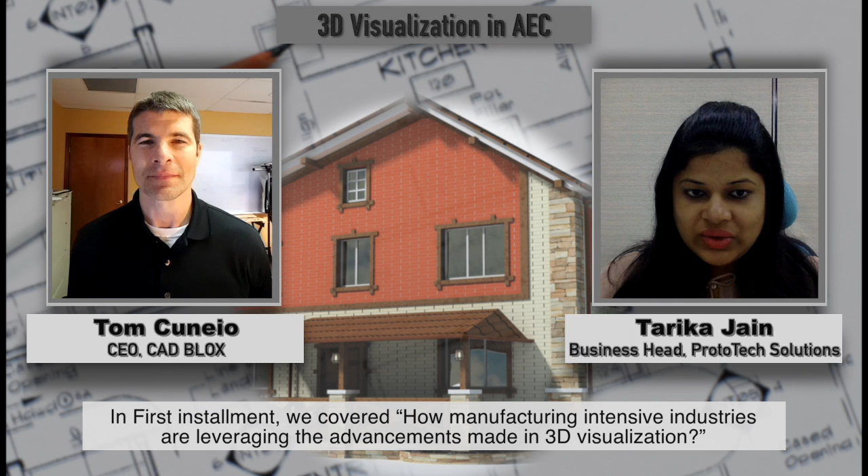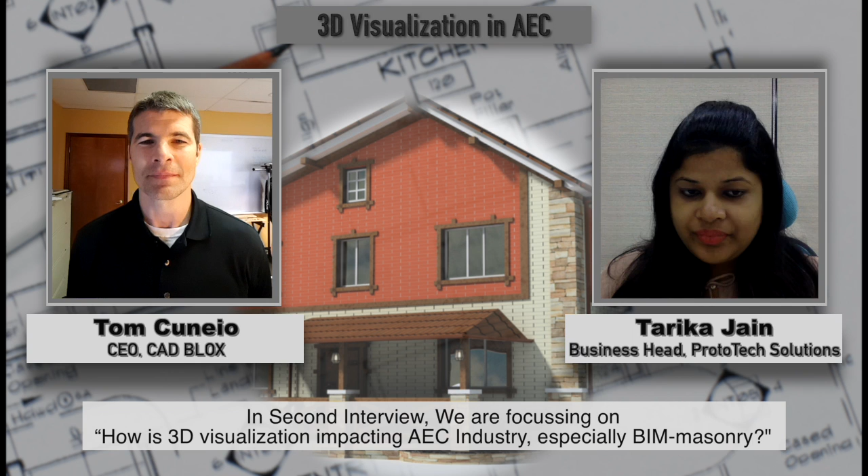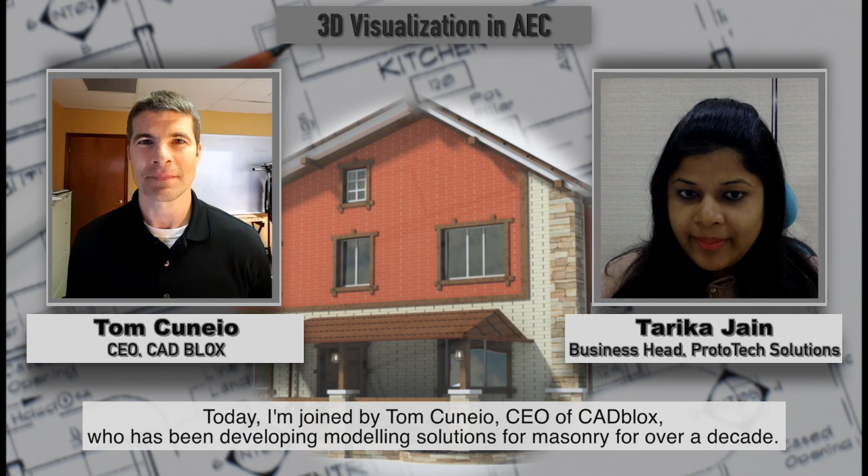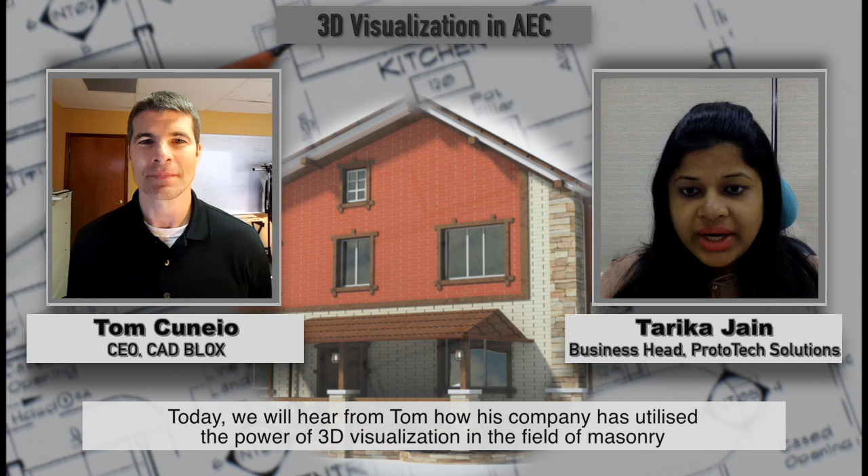In our first installment, we covered how manufacturing intensive industries are leveraging advancements in 3D visualization. In this second interview, we focus on how 3D visualization is impacting the AEC industry, especially BIM in masonry. Today I am joined by Tom Cuneio, CEO of CADblox, who has been developing modeling solutions for masonry for over a decade. We know that a BIM solution can reduce the cost of masonry projects and improve the design process. Today we'll hear from Tom how his company has utilized the power of 3D visualization in masonry, and how it's impacting masonry production and delivery.

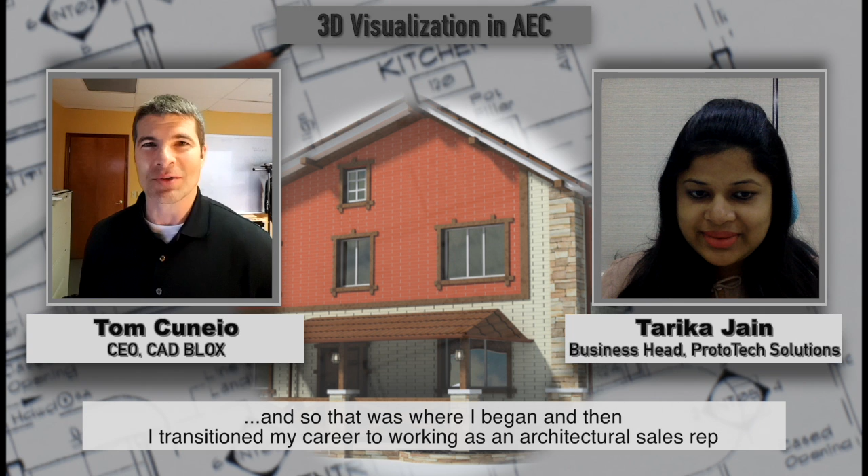I began as a mechanical engineer, and mechanical engineering design is largely based on 3D modeling to complete components. That's where I began. Then I transitioned in my career to working as an architectural sales rep for a concrete block manufacturer.

While I was there, I began to see how masonry jobs are ordered, installed, and produced. It's a really interesting challenge because you may have 100,000 or hundreds of thousands of pieces and parts in a large commercial job, with 100 or more unique shapes within that design. So you have this challenge of identifying and locating all these unique pieces and parts within a very large array, and it's actually an ideal application for 3D modeling.

So that's where I got the idea: could we apply the 3D modeling tools of engineering design to a very large commercial puzzle?

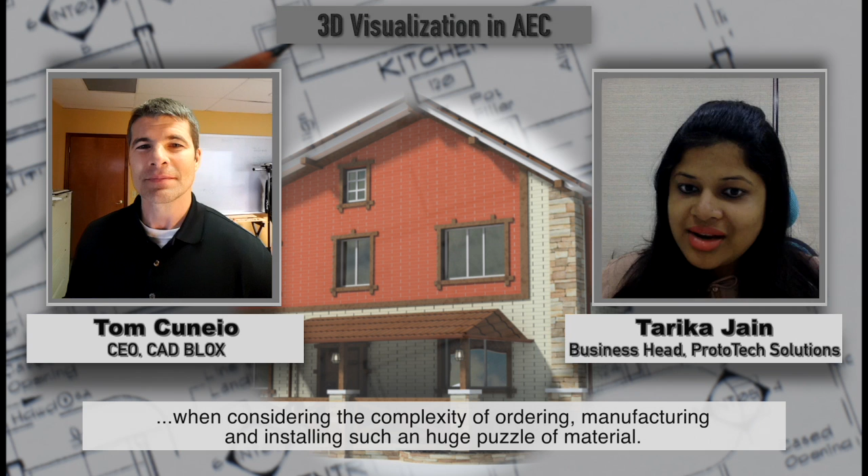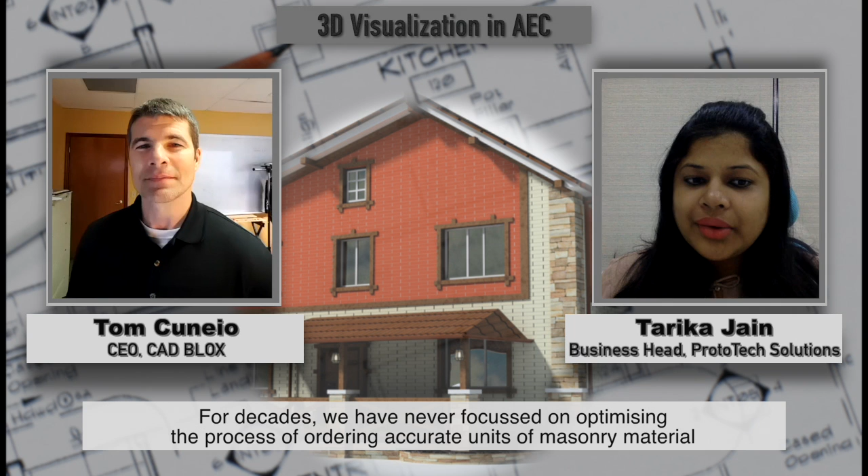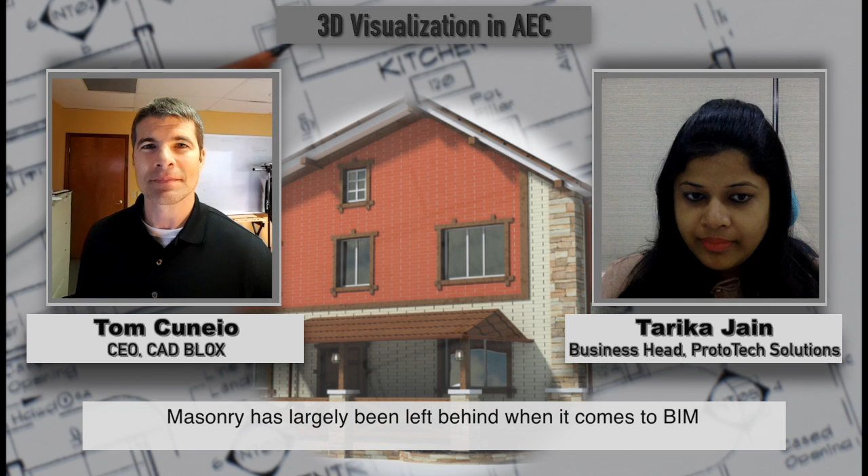We understand that masonry is in a class of its own when considering the complexity of ordering, manufacturing, and installing such a huge puzzle of material. For decades, we have never focused on optimizing the process of ordering accurate units of masonry material, and it's been an accepted norm in the industry. Masonry has been largely left behind when it comes to BIM. So how have modeling solutions like you are developing changed the way masonry is designed and installed?

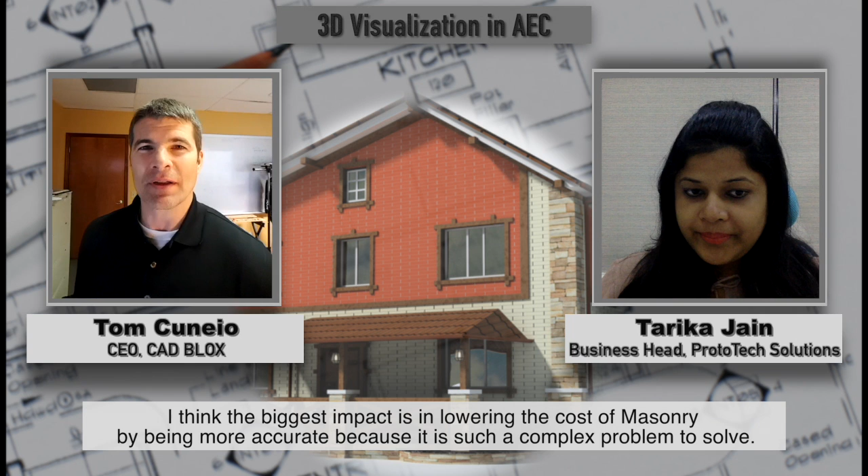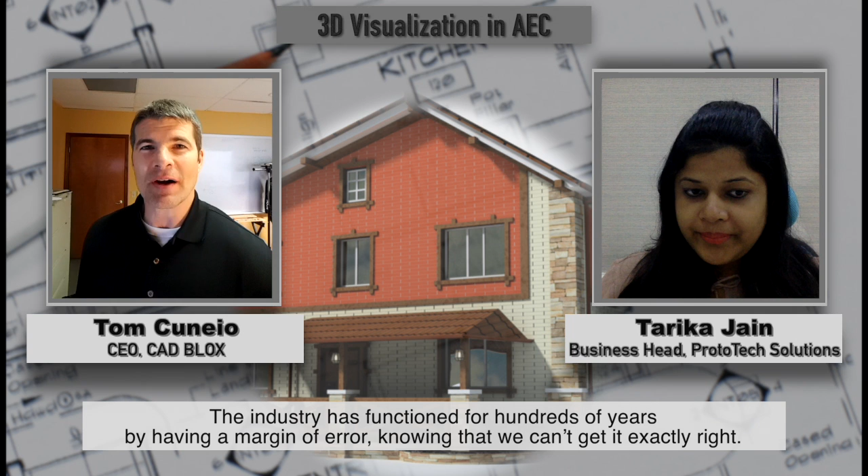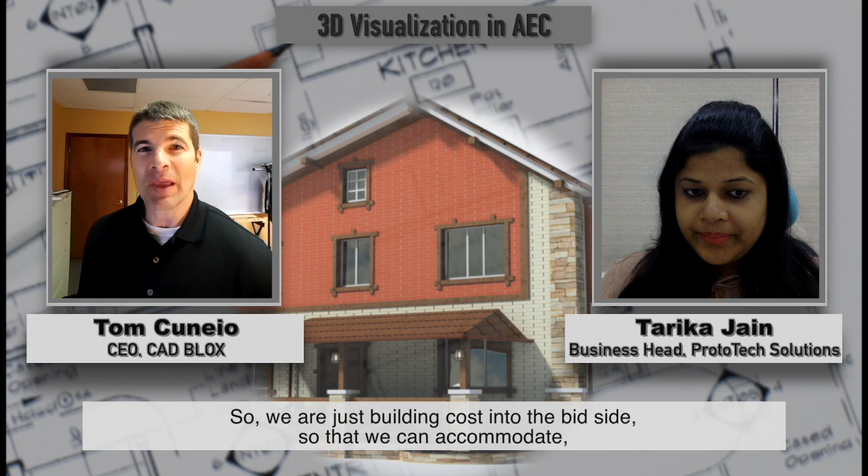I think the biggest impact is in lowering the cost of masonry by being more accurate, because it's such a complex problem to solve. The industry has functioned for hundreds of years by having a margin of error, knowing that we can't get it exactly right. So we're building cost into the bid side to accommodate the pallets or truckloads of material that wind up on site that we don't need, or the add orders and the time and material that's lost just by not being efficient in ordering.

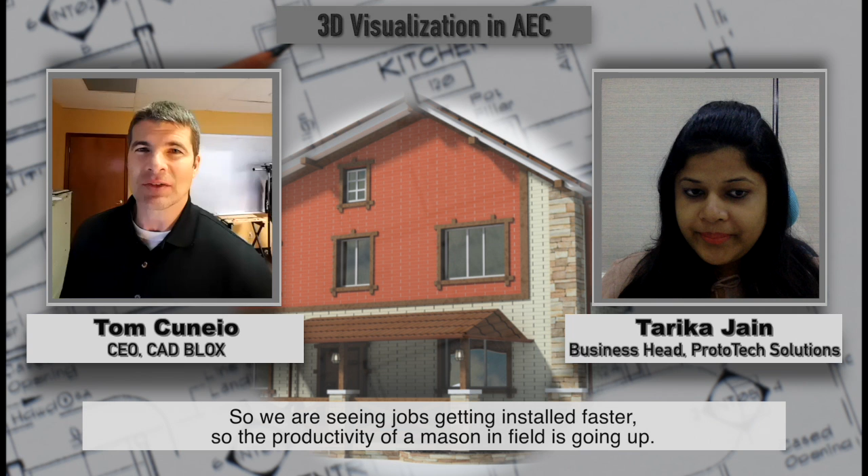So the biggest impact has been that we're able to order exactly right. We're able to get all the special pieces and parts in the right quantities. It's had a tremendous effect on cost, but also once we've got this puzzle ordered and produced, we can document how to install it. So we're seeing jobs install faster, and the productivity of a mason in the field is going up. There are a lot of ways it's impacting the industry.

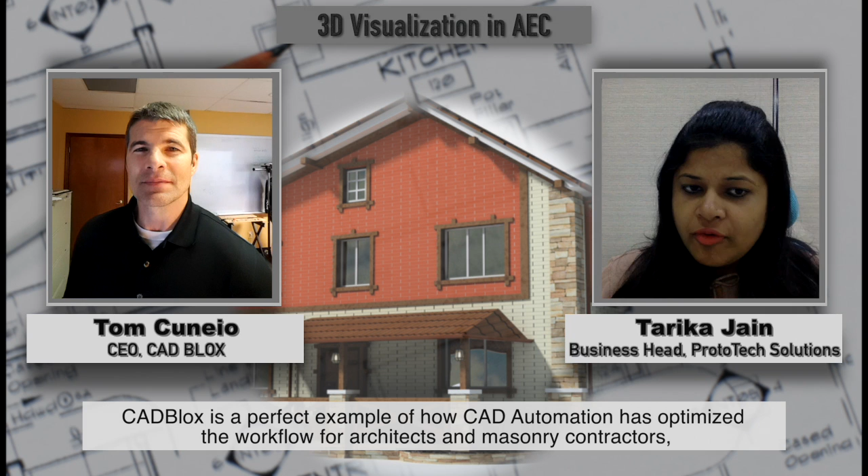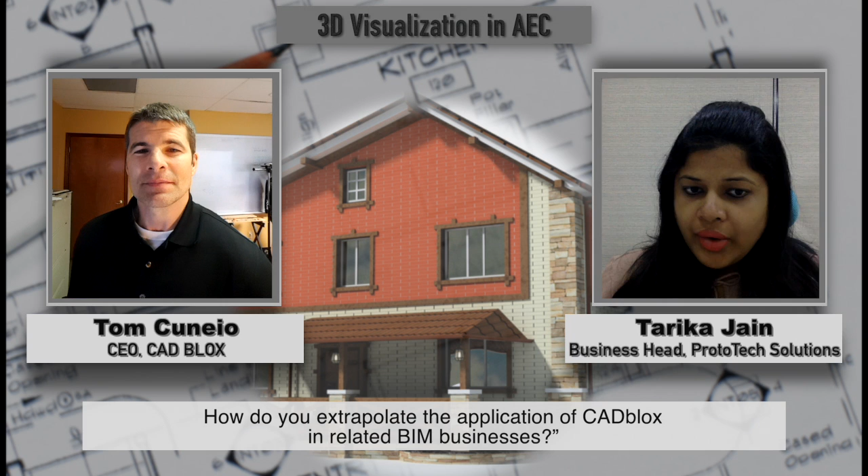CADblox is a perfect example of how CAD automation has optimized the workflow for architects and masonry contractors, bringing huge efficiency in delivery time, efforts, and project cost. How do you extrapolate the application of CADblox in related BIM businesses?

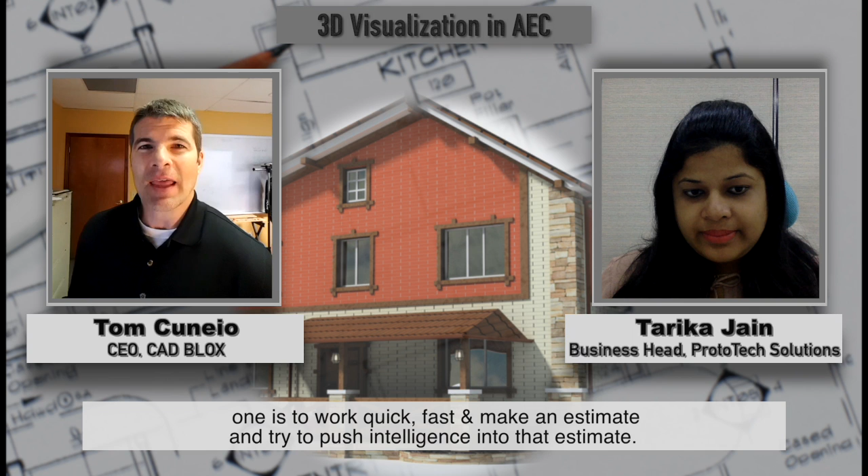Well, there are two approaches when it comes to BIM. One is to work quick and fast, make an estimate, and then try to push intelligence into that estimate. The other approach, which is the one we've taken, is to build a model that's exact. We want to have an as-built representation within our 3D model. The challenge there is you're dealing with a whole lot of detail and complexity.

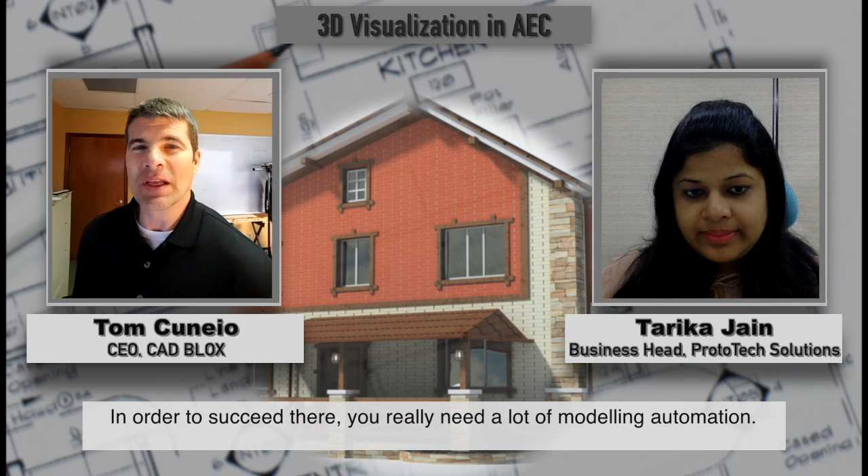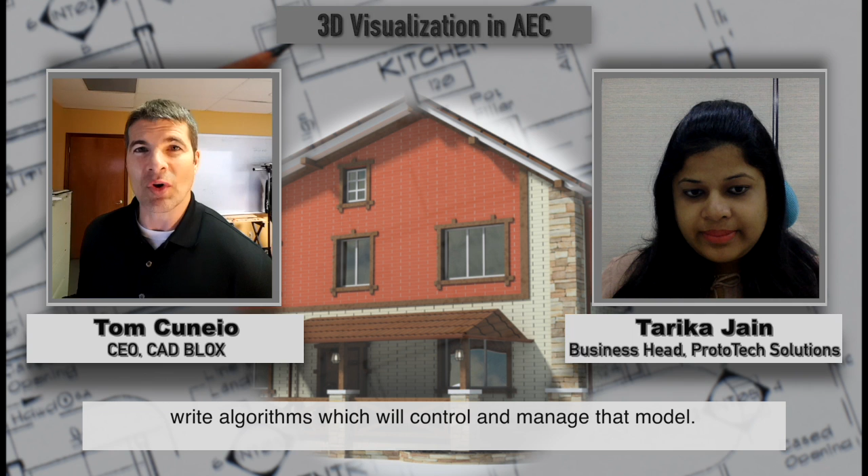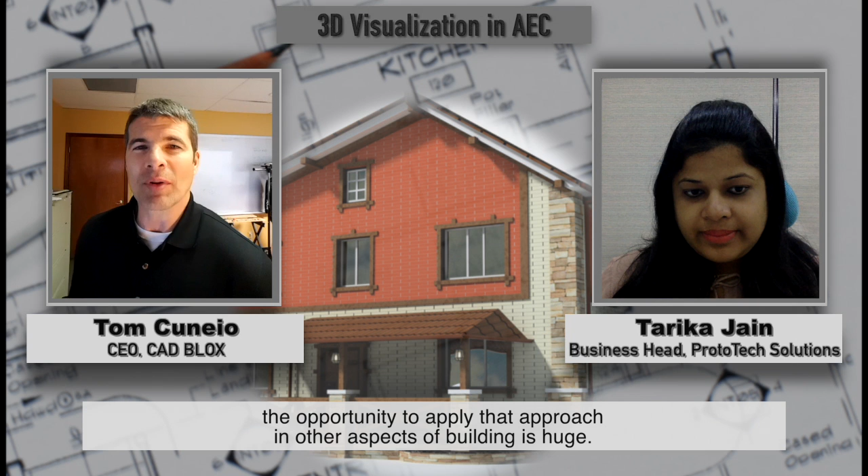So to succeed there, you really need a lot of modeling automation. You need to take as many aspects of that model as you can and script it, write algorithms that will control and manage that model. So if we're successful with a complex problem like these huge masonry arrays, the opportunity to apply that approach to other aspects of the building is huge.